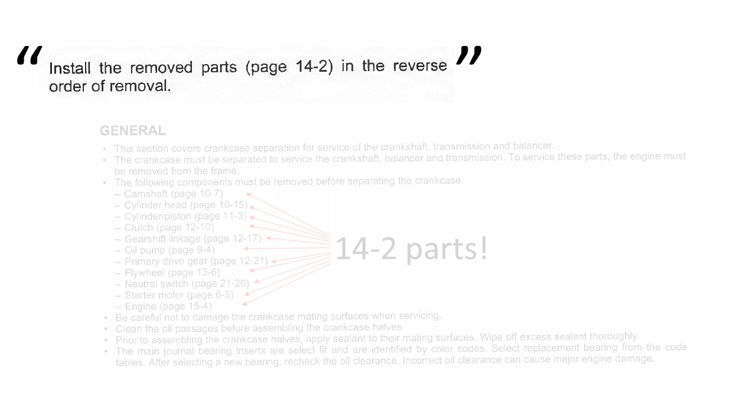Overall, it felt like the reassembly process was way easier than the disassembly, probably because I kinda knew how and where the parts are supposed to go since I had done the disassembly. That might be why the service manual doesn't actually give much information about the reassembly. It just says to reassemble it in reverse. Even so, there were a couple gotchas where I had to review my notes and videos of the disassembly to make sure I got it all back together right. Anyhow, hopefully this video is helpful to somebody someday.

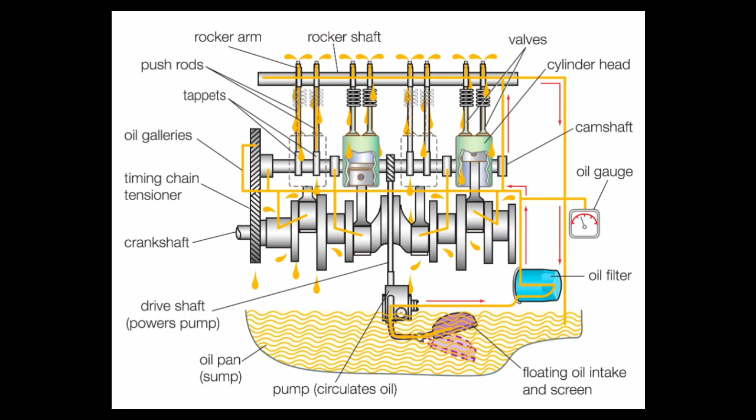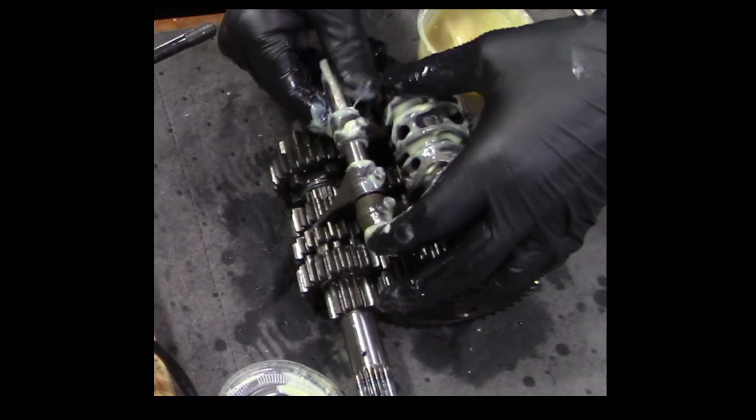Right, before we start slapping parts together, we need to address first run lubrication. Assuming we get this thing running again, the wear surfaces have to have lubrication before the engine starts running. During normal operation, the oil system will be fully primed and oil is immediately delivered to where it needs to be, but for the first few moments after the full disassembly, the oil won't be there at all. So we need to apply some sort of tacky grease so the engine can run for a minute without tearing itself apart. Because of this, the service manual calls for molybdenum oil solution in a variety of places.

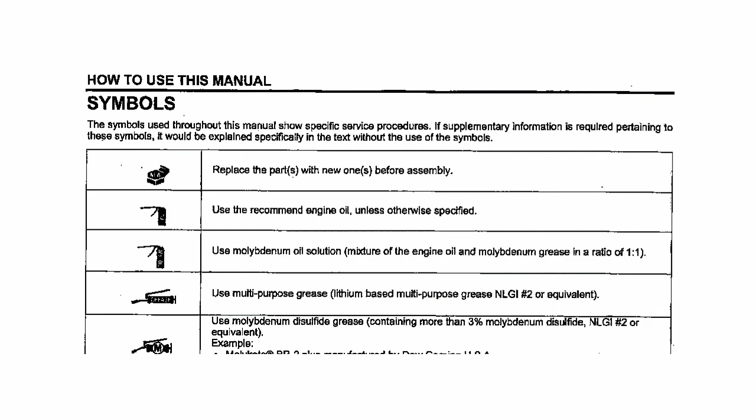The first chapter of the service manual explains that molybdenum oil solution is a 50-50 mix of engine oil and molybdenum disulfide grease. As it turns out, molybdenum disulfide grease is kinda hard to find. Is this it? It says paste, but the service manual doesn't call out this part number. This stuff is made by Honda, sounds about right, but it isn't sold online.

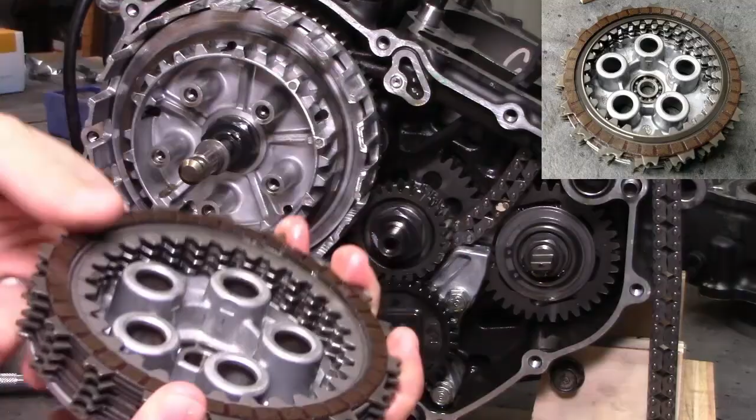So I went to a couple of authorized resellers in my area. Nobody had any. I was hesitant to use generic engine assembly grease because the CBR300 has a wet clutch and I wasn't sure if the eventual mixing and distribution of the non-recommended grease would be a problem. I spoke with two different powersports dealership service centers and both said it doesn't matter, just use a thin film of engine assembly grease. One of them had pity on me and gave me a few ounces of their preferred engine reassembly grease in a styrofoam cup, so I'm just going to use that stuff.

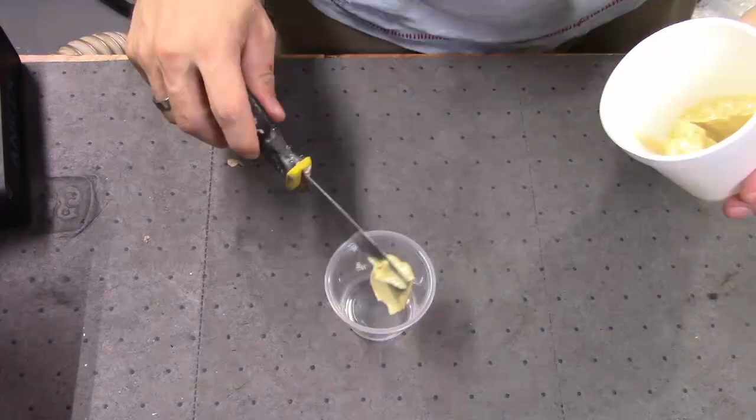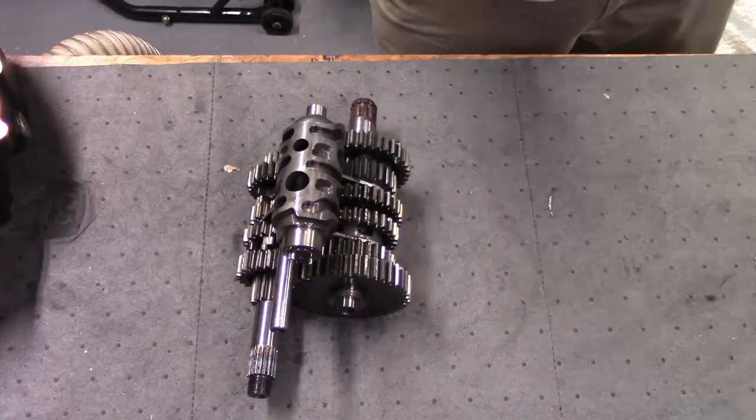Anyhow, we need to apply a thin film of this to most smooth bearing surfaces. Let's start with the transmission. I pulled the transmission stack out and disassembled the whole thing to get the molybdenum oil solution into the specified locations.

A couple things worth noting. You'll need snap ring pliers. The ones I use are from Harbor Freight and run about $5. Don't forget to oil all the gear teeth. And don't forget to align the snap ring gaps with the gaps in the gears. You'll notice I said don't forget. That's because I forgot to the first time and I had to pull the crankcase apart to redo this.

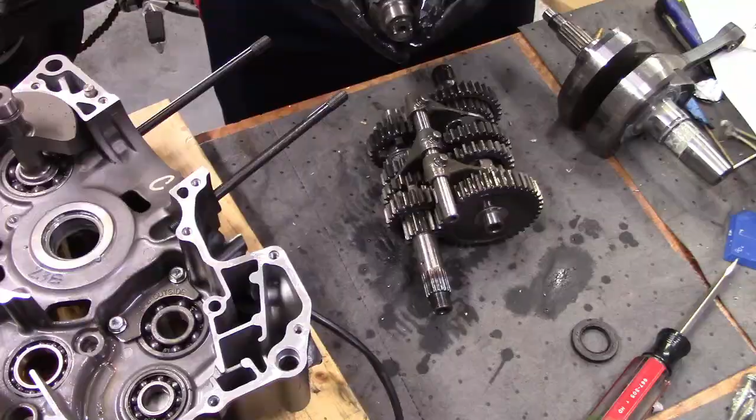Something I noticed during the redo was this oil hole. I made sure to line it up even though the service manual doesn't say anything about it. My reason for aligning it is that the geared or splined interface is not rubbing, so it needs less lubrication than the bushing interface. So aligning the holes will allow more oil flow to the bushing interface more easily.

Once the transmission is all reassembled and lubed up, you should be able to manually rotate the gear selector through all the gears relatively easily.

Next up, the countershaft oil seal. The countershaft oil seal is super easy to pull out if the crankcase is separated. Use snap ring pliers to remove the snap ring and grab a flathead screwdriver to pop out the old oil seal.

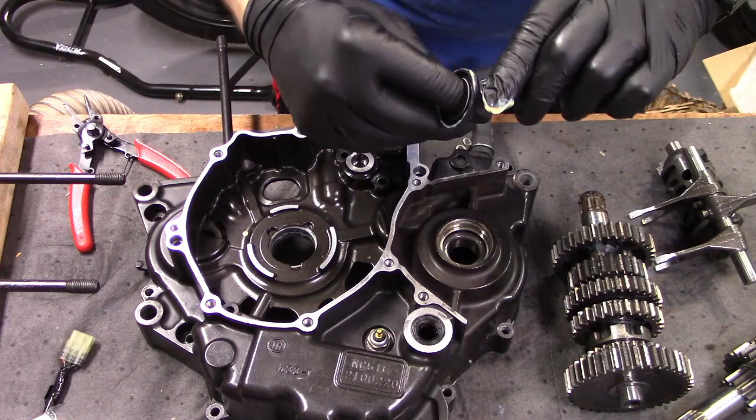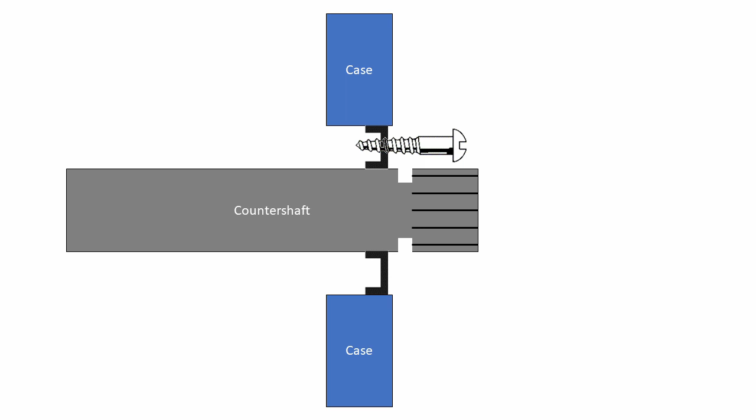Clean and oil the sealing faces before popping in the new one. If you need to replace your countershaft oil seal, you don't actually need to tear the engine all the way down. Just drill a small hole through the seal and put a slightly larger screw through it and use the screw like a handle to pull out the old oil seal. New seal installation is the same either way.

Bonding the crankcase. I'll give the bonding surfaces one last wipe down with acetone just in case any of the oil or grease touched it, and I'll have the crankcase bolts handy because we'll need them right after the case halves go together. Also, need to double check that the dowel pins are in place, and we need to apply engine oil to a new O-ring and place it right here.

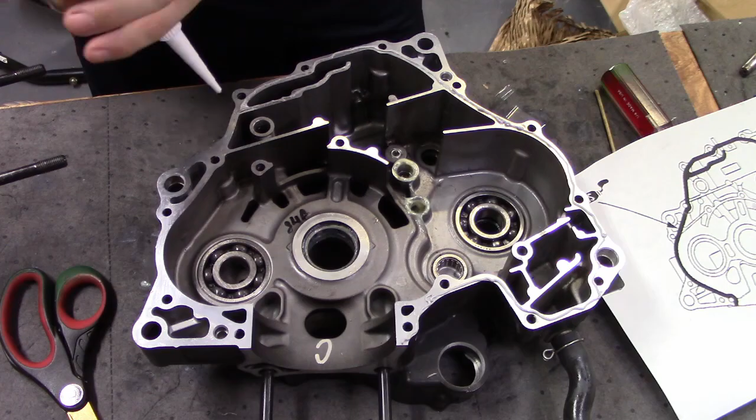I'm using Honda Bond, a high temperature silicone adhesive slash sealant. I'm confident that there are other liquid gasket type materials that could be used, but this is what the dealership recommended. I need to apply a light but thorough coating of sealant along the specified mating surface. Basically as little as possible to minimize squeeze out into the crankcase, but still maintain full coverage to actually seal the interface. I used a piece of the blister pack as my squeegee for smearing around the silicone.

With that, we'll take the other half of the crankcase and carefully place it. Don't force it. If it's not dropping in, it just means that something isn't aligned yet. Once it drops in place, we can install the crankcase bolts, using a crisscross pattern and approaching the final torque in 2 to 3 steps.

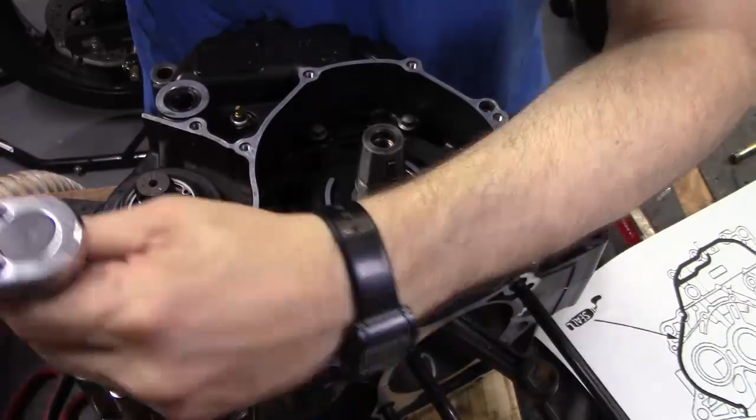I couldn't actually find the final torque for the crankcase bolts in the service manual, so I torqued to 7 foot-pounds. At this point, we can now return the engine to the engine stand.

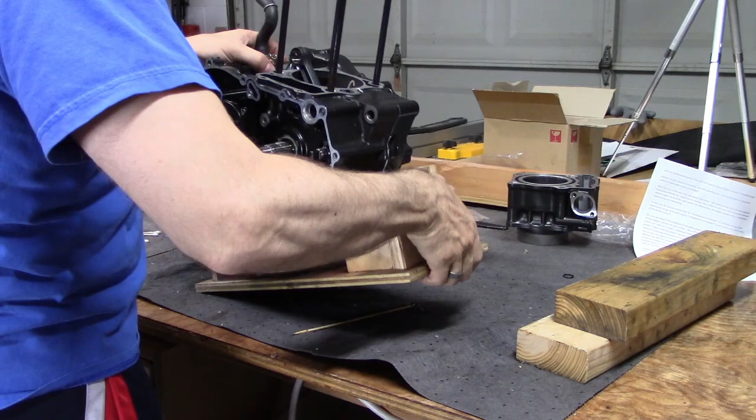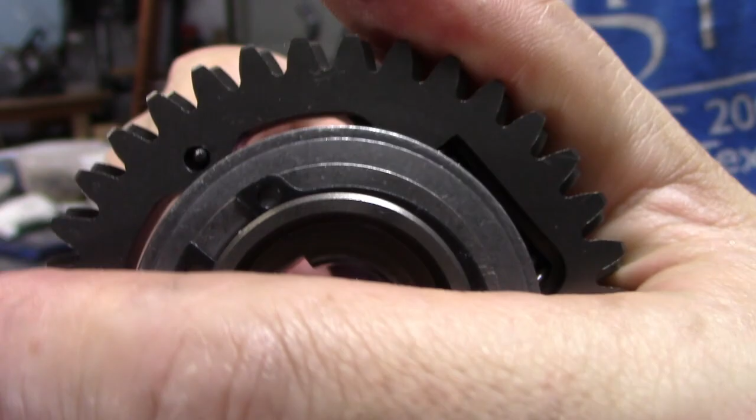Now we can install the crank-driven gear and the balancer-driven gear assembly. Prior to installing the balancer-driven gear assembly, make sure to align the through hole. I don't have a 3mm pin, so I just used an awl. Slide the balancer-driven gear assembly onto the balancer shaft splines and mesh the gear teeth with the crank-driven gear, which would then maintain the alignment. Also, be sure that the punch mark on these two gears align.

We need to torque the balancer-driven gear assembly nut to 32 foot-pounds. The service manual says to apply engine oil to the threads and the seating face. This will reduce friction while torquing and result in a higher clamping force from the nut. I anti-rotated the balancer shaft by stuffing a shop towel in the crankcase.

We also need to install the timing sprocket. It slides onto the crankshaft splines and will only fit when you align the extra wide inner gear gap with the pin punch on the end of the crankshaft.

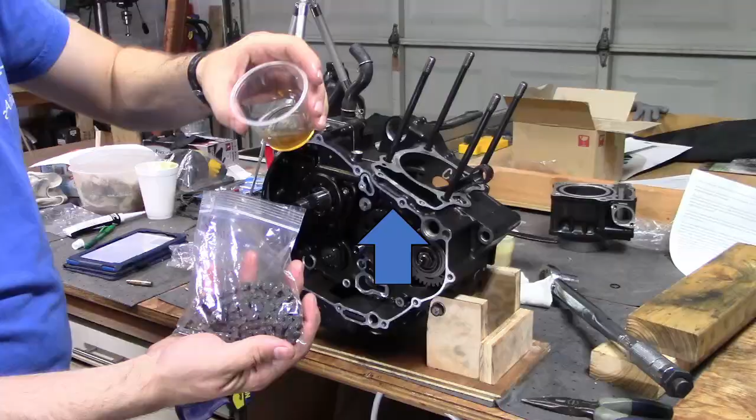I poured some engine oil into the plastic baggie where I was keeping my timing chain and worked it around a bit to get an even layer of oil all over every link. With the timing sprocket in place, we can hang the timing chain on it. Now is a good opportunity to install the timing chain guide. It's held on by just one bolt.

From there, we can install the rest of the components that go onto the right side of the engine. That's the clutch side. I started with the oil pump. Double check that the O-ring sealing surface is free of any dirt or debris and wipe on some new engine oil. Then just push the oil pump into place and tighten the bolts.

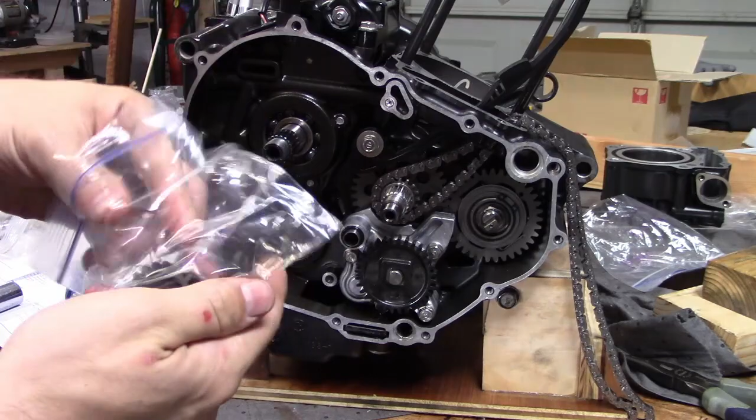Next, slide the oil pump gear into place. No fasteners required. It's driven by the primary drive gear, and that fits over the crankshaft splines. You don't need to worry about double checking alignment because there is a gap in the splines which will only slide into place when it is correctly aligned.

The primary drive gear is held in place by a nut that is torqued up to 80 foot-pounds, so I clamped the stand to the workbench and stuffed the shop towel again.

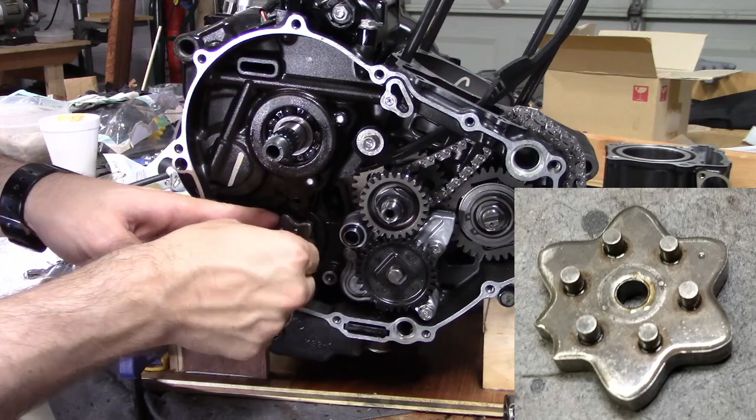Next up, I installed the gear shift linkage stopper plate. When installing the stopper arm, ensure that the spring catch is correctly engaged.

With those pieces in place, you can slide the gear shift spindle assembly in from the right side all the way through the engine so it pokes out through the left. It should have just a little spring pressure on it once it engages with the stopper plate and arm.

Now we can turn our attention to the clutch. Start by applying some molybdenum oil solution to the shaft and then installing the needle bearings and the outer basket, followed by the inner hub.

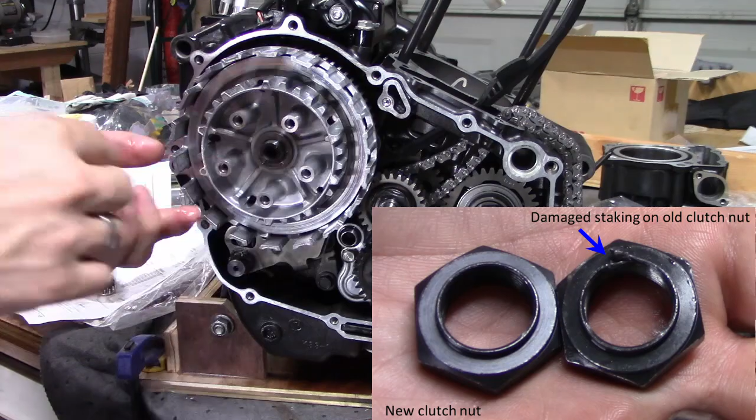These are held in place by the center clutch nut. This particular nut also has a feature to prevent self-loosening. It's a thin rim that needs to get bent down into the mainshaft groove. This is called staking and basically means you can't reuse this nut. I used an auto punch to deform the rim.

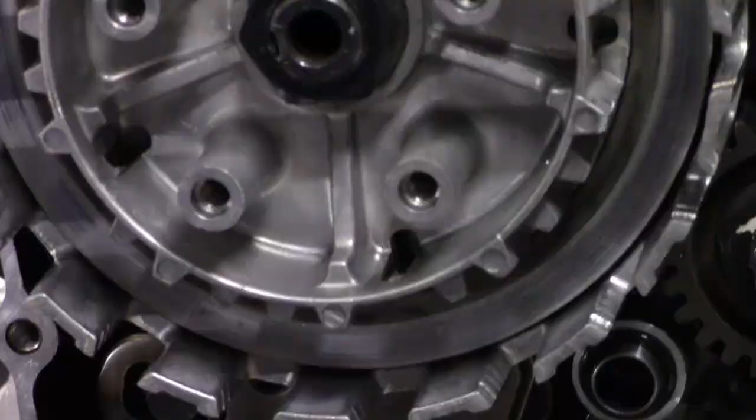With the clutch nut in place, we can oil and install the rest of the clutch assembly, the lifter piece, the judder spring, and all of the clutch plates. Notice that the first clutch plate has a much narrower friction pad than all of the rest. That's so it won't interfere with the judder spring, the thing that looks like a giant washer.

If your plates got out of order, just make sure the judder spring goes in first, the narrow pad next, and then alternate back and forth between plain steel plates and pad plates. The last clutch plate in should be a pad plate.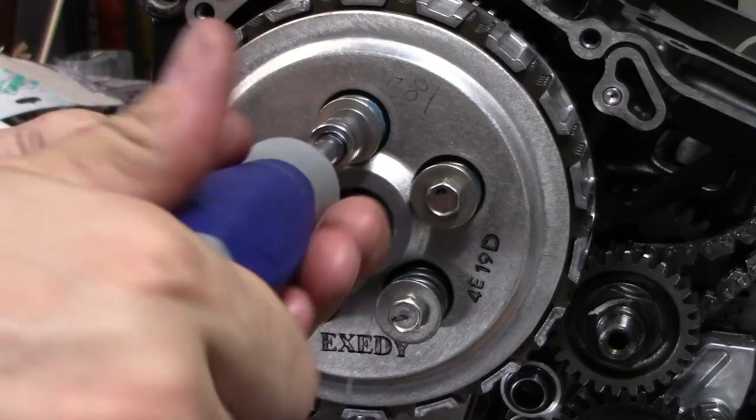Once everything is in there, you can put on the clutch lifter plate, which is held in place by the 4 clutch springs and bolts. These get torqued to 9 foot-pounds and should be approached in a crisscross pattern in a couple of steps.

Once the clutch bolts are fully installed, you can prepare to install the right crankcase cover. This is your chance to replace O-rings and also make sure that the hollow dowel pin is correctly positioned.

The O-rings are super important because those are functionally the only barrier between the oil and the antifreeze. If you are leaving in the old O-rings, make sure they are clean and in good condition.

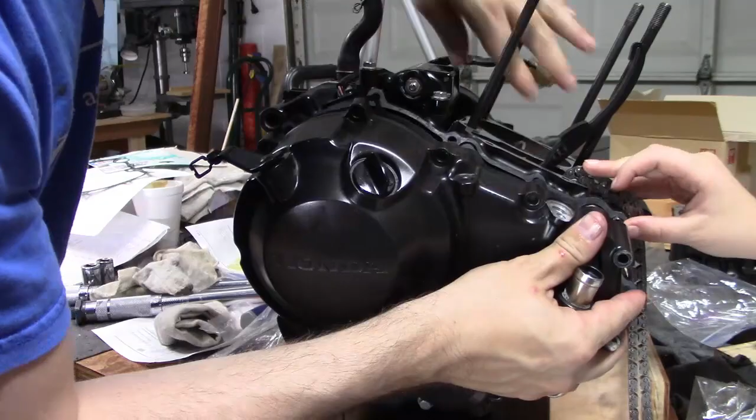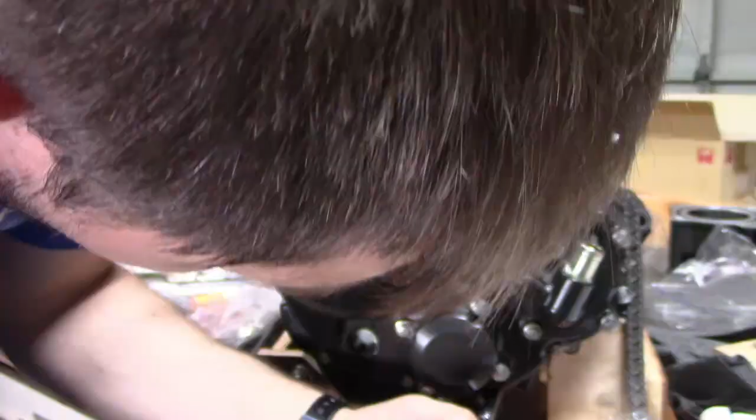The clutch cover gasket is kind of big and floppy, so it might make more sense to lay the engine on its side instead of doing it upright like I did. Either way, once everything is aligned, you can install the right side cover bolts. Keep in mind there will be 2 empty spots, here and here.

That's where the clutch cable bracket bolts go once we've got the engine back in the bike frame. Next up, the left side components. That's the alternator side. Let's first put on the starter motor. Need to make sure that the O-ring is free from dirt and debris, and then put some new engine oil on it and then just push it in. 2 bolts hold it down.

Next up is the flywheel. We'll apply some molybdenum oil solution, install the needle bearings, and then push the flywheel into place. This will be held in place by the flywheel bolt. To prevent the flywheel from rotating, I'm using the shop towel trick again, and I'll clamp the engine to the workbench. Torque to 94 foot-pounds.

Next, apply some molybdenum oil solution to the starter motor reducing gear shaft and slide the gear and shaft into place between the flywheel and starter motor.

Last, on the left side, is to install the cover. We need to line up the dowel pins, hold the new gasket in place, and slide the cover on. The magnetic attraction from the alternator will try to pull it in at the last second, which makes the alignment a little more challenging. Once the cover was in place, I torqued the left side cover bolts to 7 foot-pounds. Don't forget to route the wire downwards and plug it in.

Piston. Now that the entire bottom end is back together, we can start on the top end. First up, we need to put the piston on the end of the connecting rod. But before that, we need to pre-lube and install the piston rings.

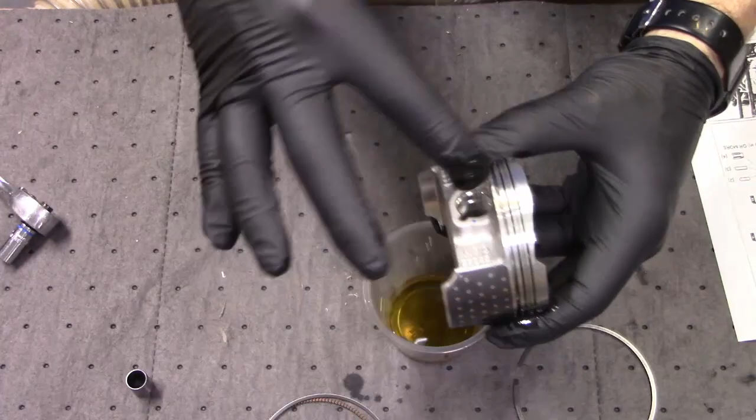After applying a generous amount of oil to the piston ring groove and piston rings, we can install them. When installing the piston rings, minimize the amount of distortion to avoid damage, and also be certain that the correct rings go in the appropriate grooves.

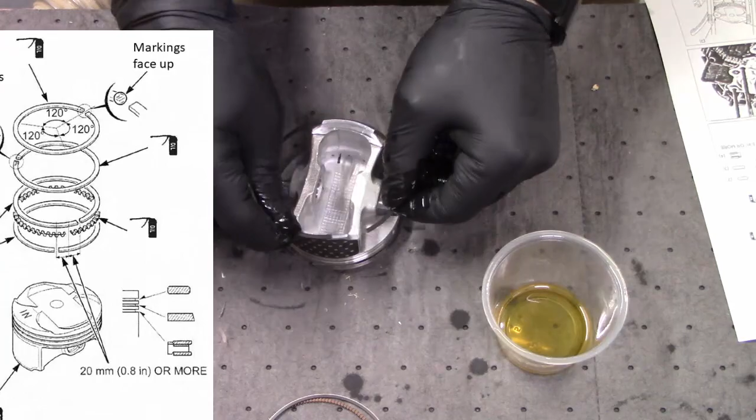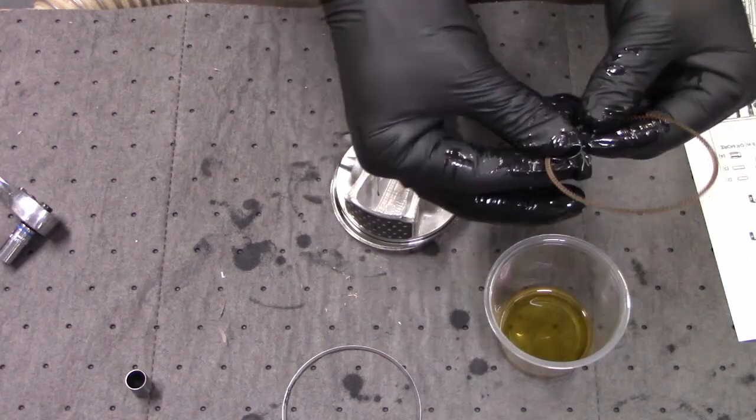The topmost ring has a very slight rounded edge profile, and the second ring has a subtle bevel, where the wider edge needs to be down. A good way to ensure that the orientation is correct is to keep the markings face up. They're pretty faint laser markings, but if you look close enough you can see them.

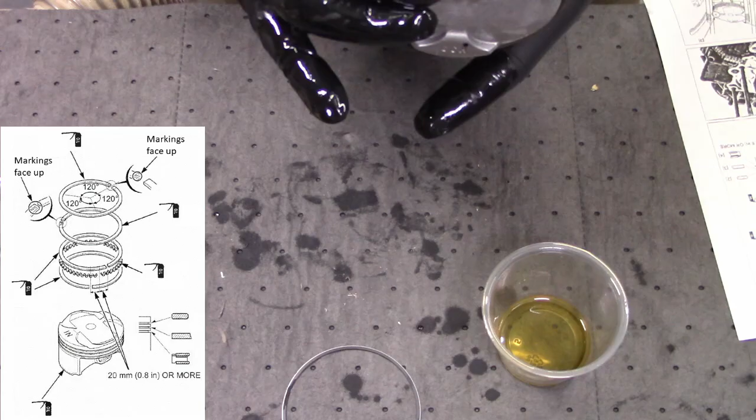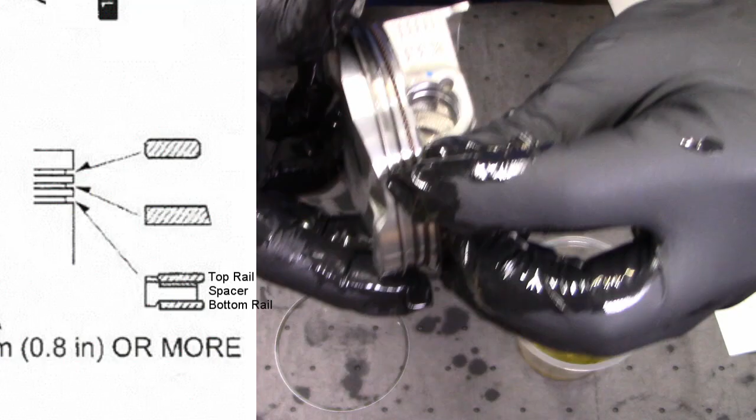The third groove is home to 3 separate rings, a corrugated spacer, and 2 side rails. Start by installing the spacer, and then install the side rails. Once all the rings are in place, adjust them within each groove such that the gaps are misaligned as much as possible. This will create what's called a tortuous path and will help minimize the escape of combustion gases during each power stroke while the engine is in operation.

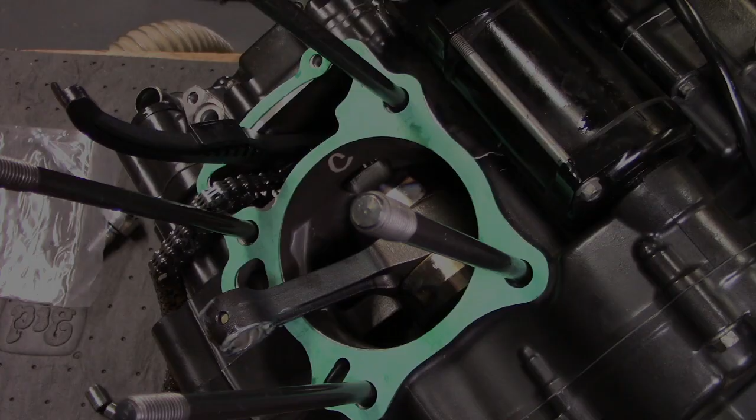With the rings on the piston, we can apply molybdenum oil solution to the wrist pin and the underside of the piston. After the molybdenum oil solution is in place, start by installing one of the wrist pin clips, then align the piston to the connecting rod and slide the wrist pin in.

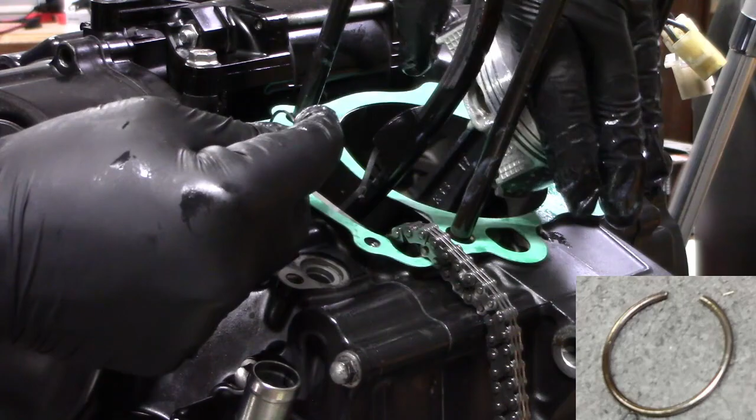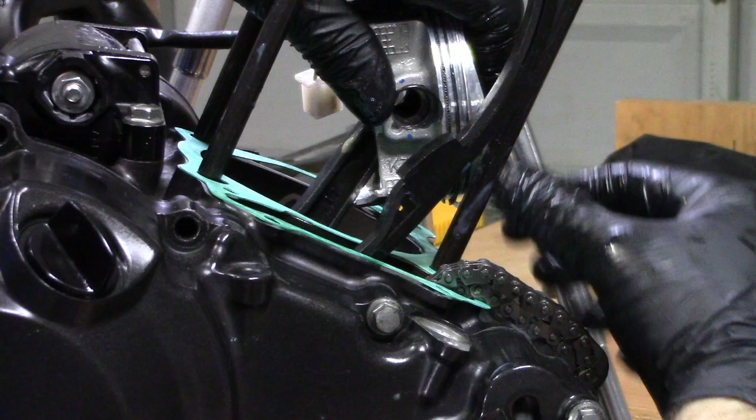This next step could be the most difficult step in the entire rebuild process. With everything slathered in molybdenum oil solution, now you need to install the other wrist pin clip. This is really difficult to film, but basically what you want to do is hold one end of the wrist pin clip in place and work it into the groove incrementally from your start point all the way around. Throughout this process, make sure you maintain pressure on your start point or the spring will fly out and across the shop.

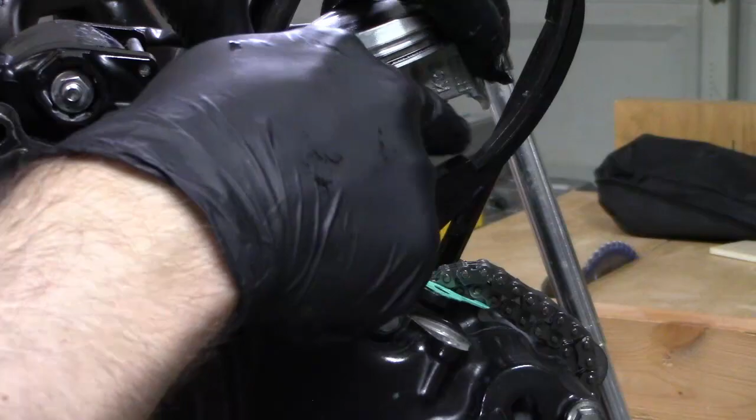After both clips are in place, adjust their position within the groove such that the clip gap is misaligned with the piston cutout.

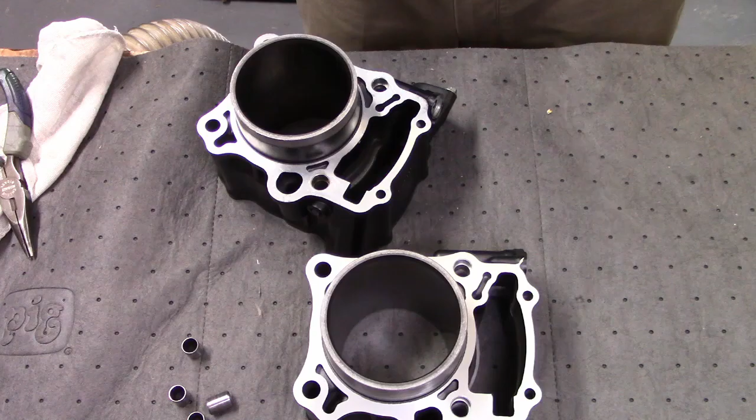Now we can turn our attention to the cylinder. Before we get too far here, we need to swap over the timing chain tensioner since the new cylinder didn't come with one and the old one, still attached to the old cylinder, is in perfectly good shape.

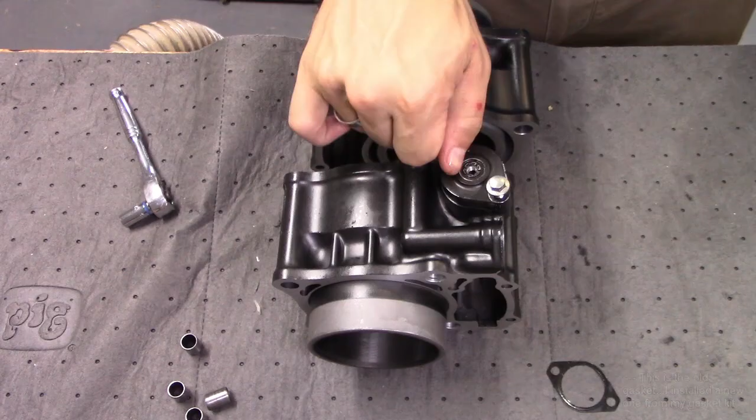Next, be sure to generously oil the new cylinder wall. Fun fact, the shallow crosshatch scratch pattern that we see inside the cylinder is intentional. It will help the break-in process where the new piston rings will wear into the new cylinder, creating a matched set. Anyhow, place the new gasket on top of the crankcase and install the dowel pins.

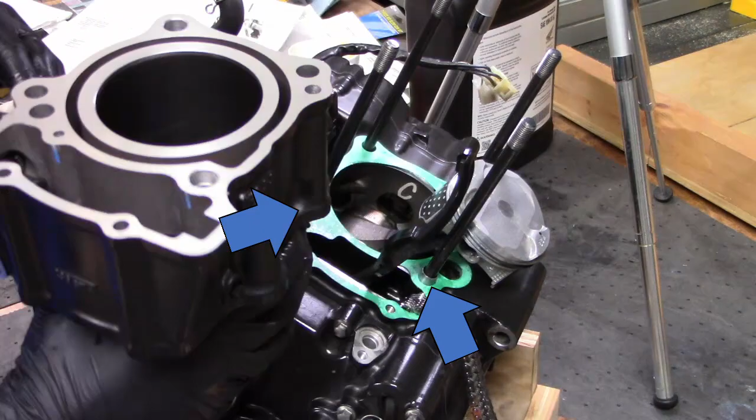With those in place, we can carefully drop the new cylinder over the head studs. You'll need to pull the timing chain up and out and then compress each piston ring while carefully sliding the piston into the cylinder.

To help keep the timing chain from sliding back down, I zip tied a pair of pliers to it. Worked great. Getting the piston inside the cylinder was actually a bit easier than I had expected. Just take your time, keep the piston square to the cylinder, and compress one piston ring at a time. I also found that wriggling it back and forth helped the rings get past the chamfered opening. Once all the piston rings are inside the lower edge of the cylinder, it should slide the rest of the way down pretty easily.

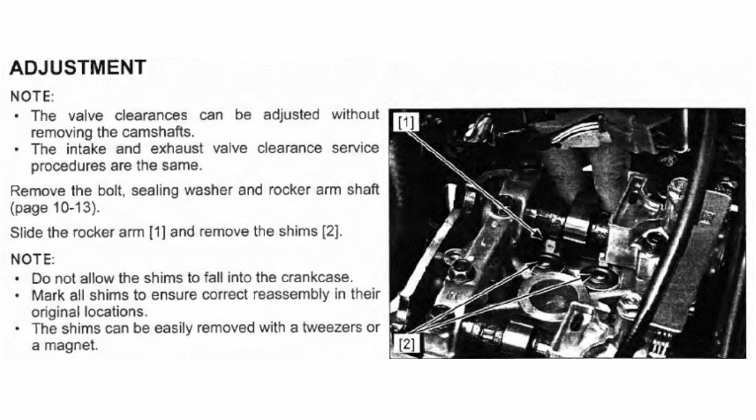With the cylinder in place, we can now install the head. If you want to try to clean up any carbon deposits on your valves, now is your last chance. I used some motor oil and a brass wire brush and then a new shop towel to wipe away the resulting schmoo. It looks a little better, I guess. I suppose this would also be an ideal time to check and adjust your valve clearances, but I completely forgot about that and didn't do or film anything related to that, so maybe in a future video.

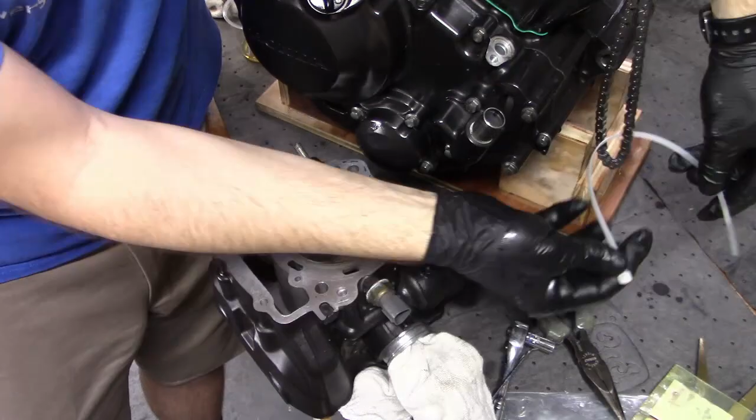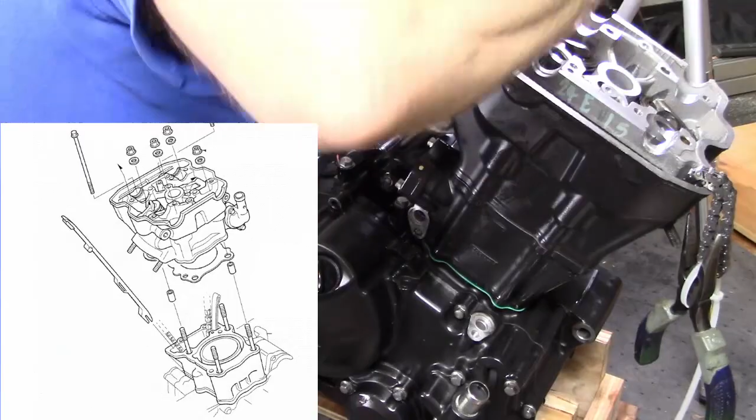Anyhow, to install the head, start by installing the new gasket and dowel pins. Thread the timing chain up and out and then drop the head into place. Pretty easy—so easy that you might forget to install the timing chain guide like I did. I actually had the whole engine together when I found the timing chain guide on my shelf, and I was so pissed about it that I didn't even film the hour or so of disassembly and then reassembly. It's not even difficult to install, but you have to put it in after the cylinder and before the head.

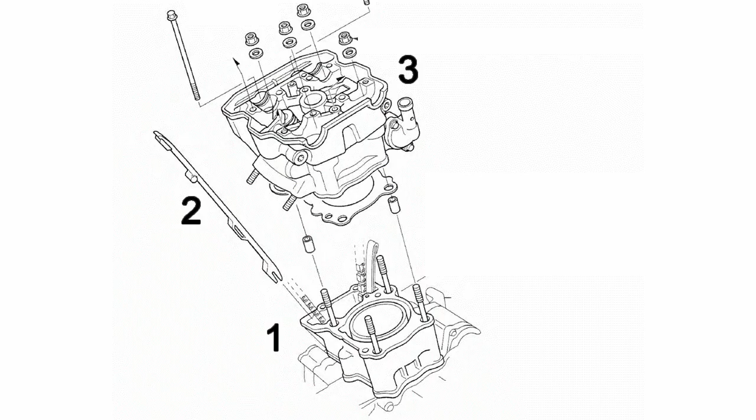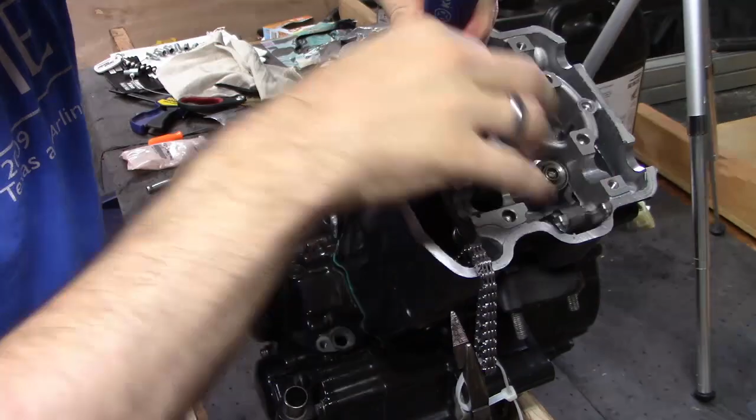Anyhow, with the head and timing chain guide in place, we can install the 2 head bolts to 7 foot-pounds and the 4 head nuts and washers to 33 foot-pounds. When placing the washers, be super careful to prevent them from dropping down into the crankcase. I did this by placing the washer over a screwdriver and then holding the washer back until the tip of the screwdriver was touching the head stud, at which point I could drop the washer and be confident that it would slide into place without worrying about it going somewhere where it shouldn't.

Now is a pretty convenient time to reinstall the water pipe. It goes on easy with just 2 bolts, but be sure that the O-rings are in place.

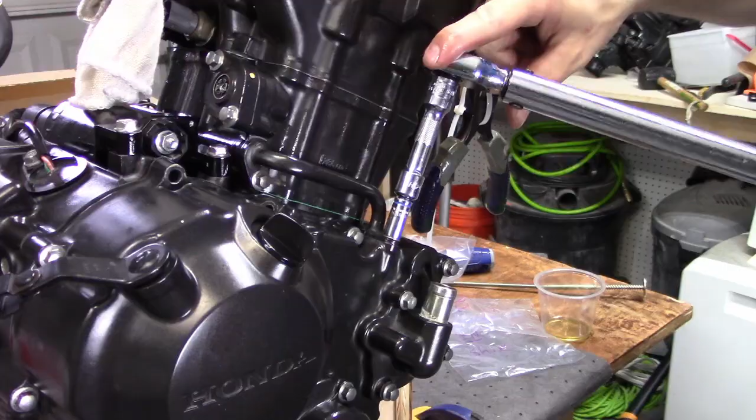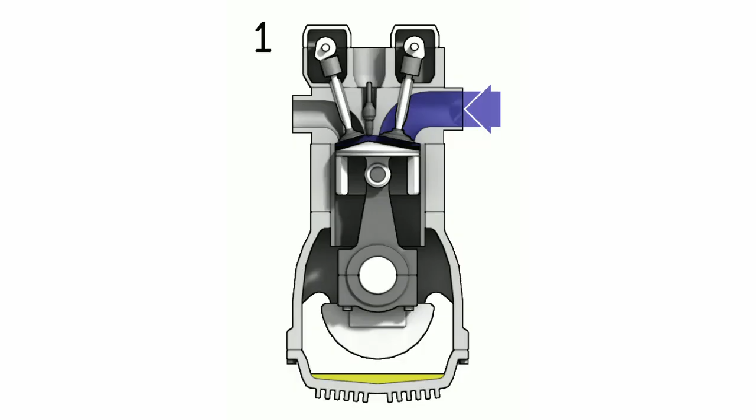Okay, so after the head is in place, we can now get ready to install the cams. First, I installed the 4 valve shims. Next, we need to ensure that the piston is at top dead center. I know it's pretty close, but it needs to be exactly at top dead center. To check, I'm going to pull out the spark plug with a typical 16mm spark plug socket, and then drop a wooden kitchen skewer through the spark plug hole into the combustion chamber. Now I can make a mark on the skewer and rotate the crankshaft until the mark is in the absolute highest position. This is top dead center. Now we can apply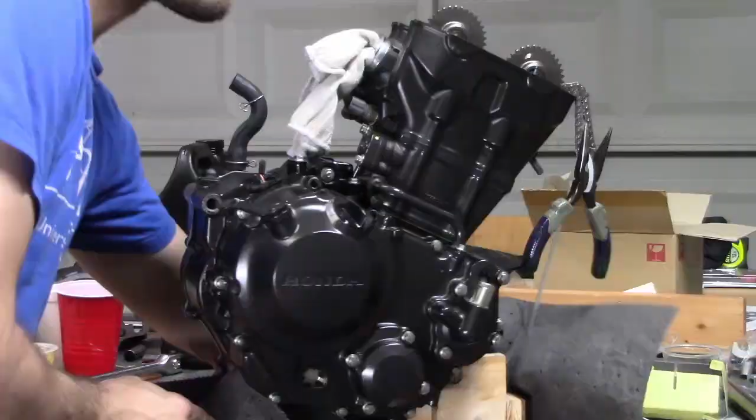Molybdenum oil solution to the cam journal surfaces and get the cams in place. I was struggling to get the chain over the cams pretty bad right up until I remembered to release the cam chain tension with a small screwdriver held in place by a vice grip. After that, the cams went in much more easily.

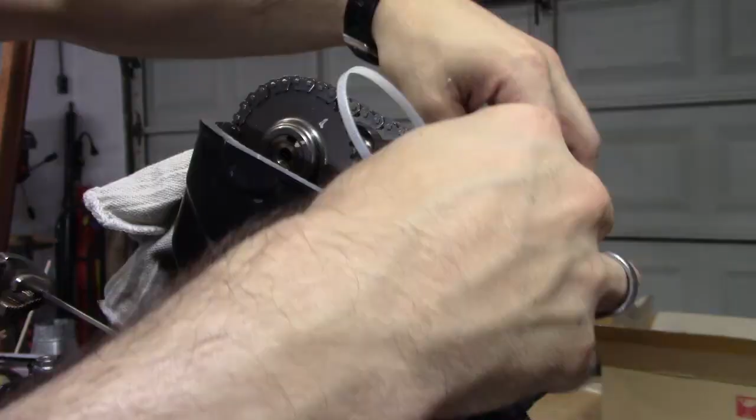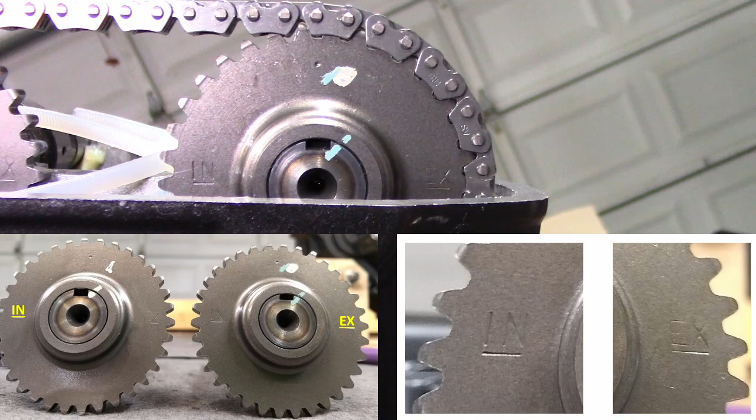The top dead center cam position is when the IN and EX markings line up like this, and the underline is even with the top of the head. Once the chain is on, we can slather the cam holders and chain guide in molybdenum oil solution, and then torque them down to 9 foot-pounds.

I reinstalled the spark plug at this point, but you could really do it anytime you feel like. The electrode gap should be between 0.031 and 0.035 inches, and the installation torque is 12 foot-pounds.

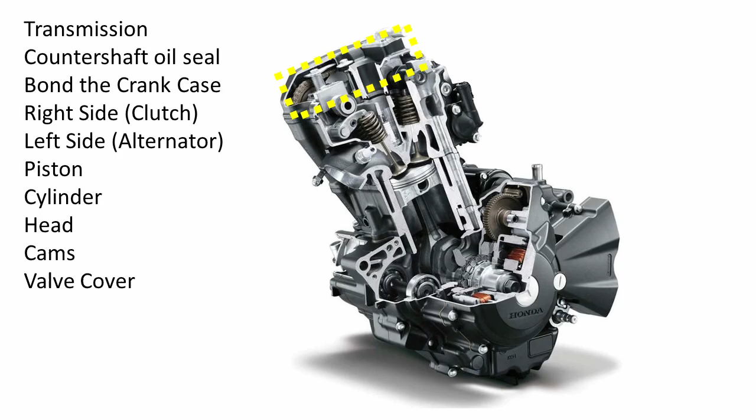Last but not least, the valve cover. This has a thick rubber gasket. I'm not sure if it actually needs silicone, but I know it had silicone on it when I pulled off the old one, so I figure I'll use some during the reinstall, because I've got a whole tube still. I acetone and wiped all of the surfaces that would come into contact with the silicone to help it actually form a bond. This was most important for this spot in the middle. Anyhow, put the 2 valve cover bolts in and torque to 7 foot-pounds.

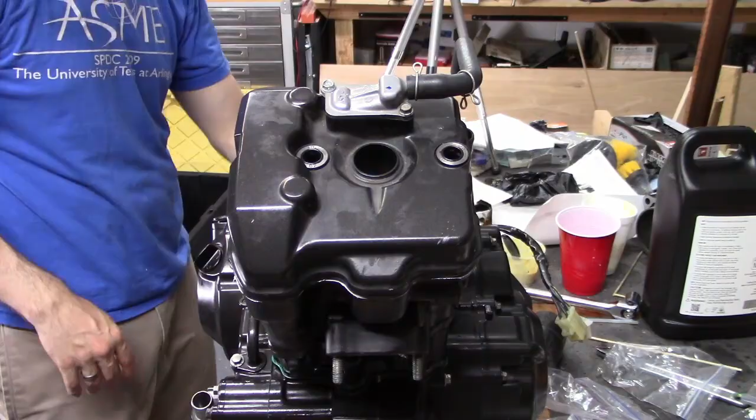Well, that's a pretty good stopping point. With any luck, this thing will actually run once I've installed it back on the bike. Thanks for watching.